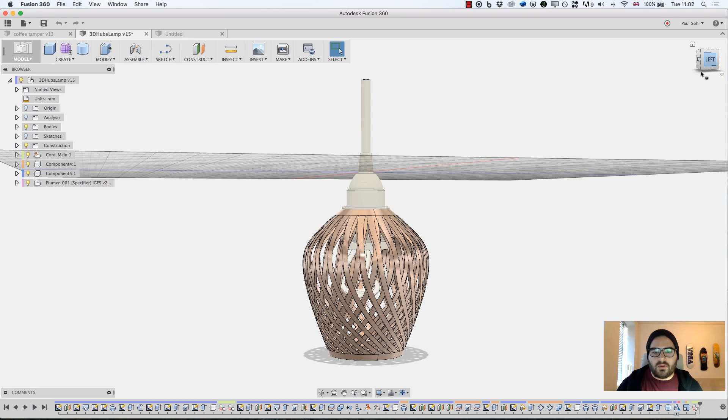This is the lampshade you guys will be building during this class. It looks pretty cool. It might look super scary and hard to build, but I promise you it's actually very easy.

So you'll be looking at a screen like this right now. Basically, this is Fusion 360. This is what you're going to be seeing. At the top here is your tools. Over here is a browser. This is where, as you model, everything that you build is going to show up. So if you ever do a 2D drawing, make a 3D piece, do a construction plane, whatever it is, it's always going to end up here in the browser.

Down here is comments. We'll talk about that in another video. You have your timeline down here, and the timeline is going to record everything that you do as you do it, meaning that if you make a mistake or need to make a change, you can rewind time on your model, and you can also just double click on one of these things and make a change to it. That might not make a huge amount of sense right now, but as we get into it, it'll make a lot of sense.

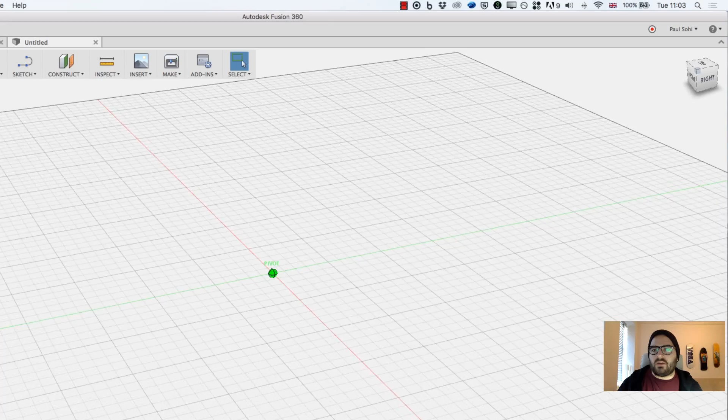In the top right over here, we've got the cube. This is your navigation cube. This basically helps you rotate and look around your model. You just grab it with the mouse and move it around, and you can click on the different faces. Your little home button, if you ever get lost, you can click on that.

Down here at the bottom, we've got a couple of settings and options. You can orbit the model manually this way if you like. Some people prefer that. You can use the look at button, which I'll show you how that works later on. The panning tool is just going to pan the model around, zooming in and out, and then a zoom window which will let you pick an area to zoom in on, or you can pick fit the model, which isn't going to do anything right now because I don't have anything in this one.

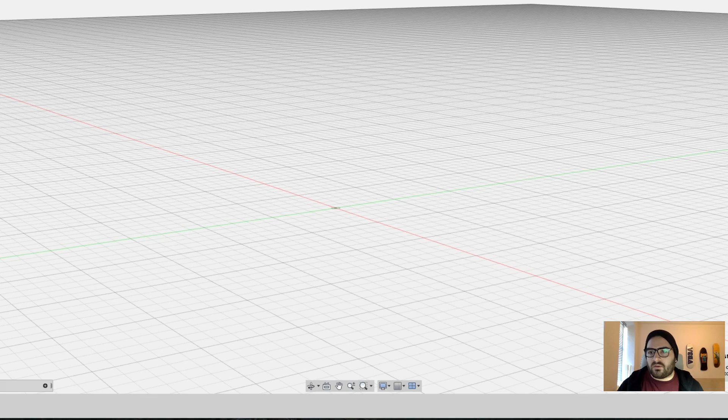And then over here you've got display settings, so you can see my display settings here. I'd recommend that you use the same ones that I do. You don't have to, but for the sake of this video, you might find it a bit easier to copy what I'm doing. Grids, we'll talk about these in another video as well.

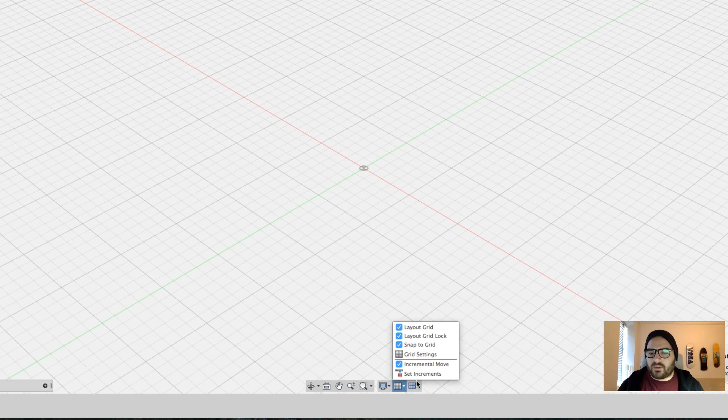And then viewports. Now I use the single viewport. I think it's great, it does everything really nicely. You can pick a multiple viewport mode as well, which is going to show you basically your same model on 4 different mini screens, so you can see it at an angle, then the front, the side, and the right, if that's what you want. But I'm going to go back to single view.

That's what I prefer. Now, one other thing is, it might not look like you've got a lot of tools up here, but actually if you see, you've got a little drop down menu and you can go through all these tools. We're going to be sticking to these two and the sketching one today. We use a little bit of construct as well.

Over here you can see you've got different workspaces. So right now we're in model. I'm just going to quickly explain what these 6 are. So model is basically solid modeling. So if you model a cube and you cut it in half, you'd basically have a solid object. Like if you sawed through that, you'd see that it was filled in.

Now, if you made the same cube in the patch environment, you would actually just have the surfaces. So it looked like a cube, but if you chopped it in, there'd be no thickness, which is not so great if you want to make it in the real world, but it has its uses.

Rendering is basically where you're going to make everything look pretty and set things up when you want to show off your work. Animation—you're not going to make a Pixar movie. Why would you want to? It's a lot of work.

But what you can do here is basically explosions, pan-arounds and rotations - you can show how your model works and give people a really good idea of what's happening in it. Simulation's a really good place to test stress, and you can also do thermal simulation now, which is a really cool thing that Fusion has added.

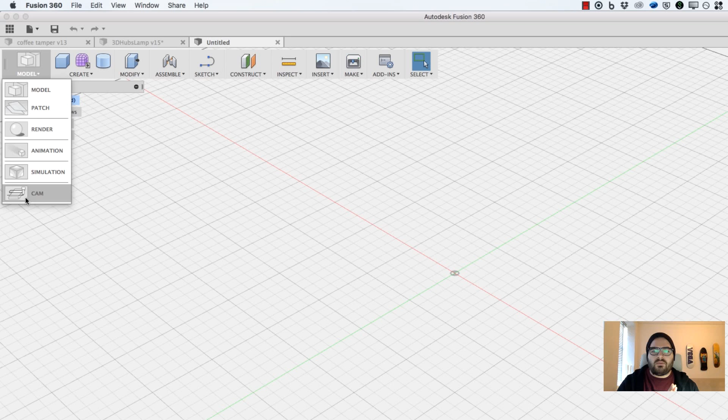And then finally CAM. CAM is basically CNC milling. For those of you who don't know about CNC milling, I'm going to put a video over here linking to the main Fusion 360 channel, and that'll show you how that works.

Okay, so let's jump right in. So to build this, what I'm going to do is start off with a 2D drawing. To do that, I'm going to go over to Sketch and Create Sketch.

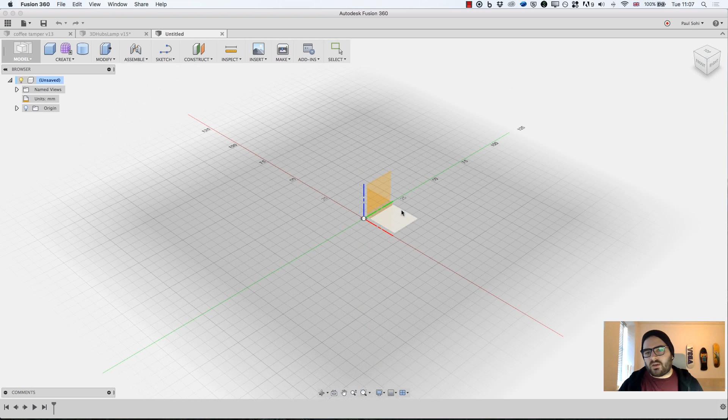I'm going to have these three planes show up, and they're asking me where I want to do my drawing. For the sake of this one, I'm going to pick this front plane. When I click on it, it jumps into this 2D view looking at that plane. I'm just going to pan my view over a little bit. You can see down here I've got this point, and this is the origin point of your drawing. Now your Fusion grid basically goes to infinity, but it has a 0 point, and that's this guy over here. This is important for this video.

So what I'm going to do next is go to Sketch, and go to Line. I'm going to draw two lines here. I'll start at the origin and draw one out like that - I'm not really going to pay attention to the dimension there. Then I'm going to click on this tick here, which basically says that I'm done drawing this line, but I want to stay in the line tool.

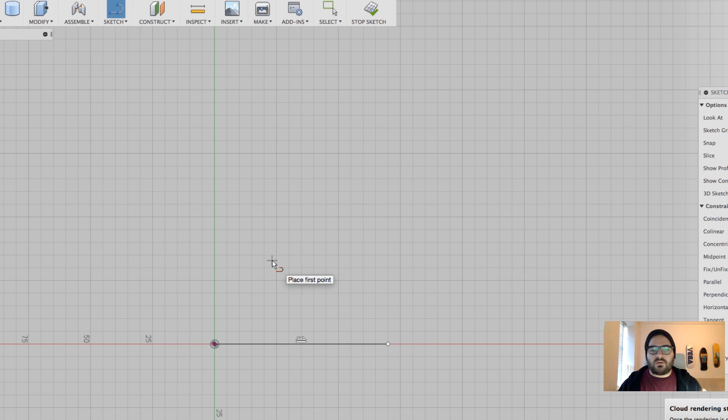You can see that next to my mouse I've still got the little line icon, meaning I can start drawing another line. Now I'm going to click there again and draw up and outwards like that. You can see I can keep drawing outward this time because I didn't hit that tick. So I'm going to do that and then hit OK. Now I'm going to hit Escape on my keyboard.

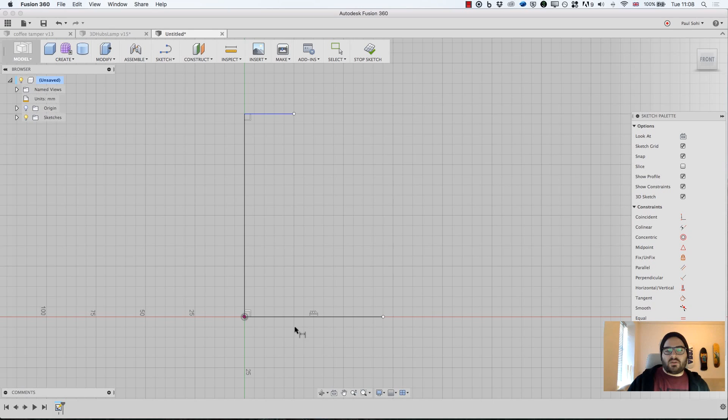And I'm going to go back to Sketch, and pick Sketch Dimension. Sketch Dimension basically means that when you click on these lines, it lets you add a dimension in.

For this lampshade, I'm working with an Ultimaker, so I know that the Ultimaker bed has basically got a safety margin of 180 millimeters by about 200 millimeters upwards. It can print bigger than that, but I try to stay a little bit inside those limits. The reason I'm telling you that right now is that it's kind of important for the way that I build this lampshade.

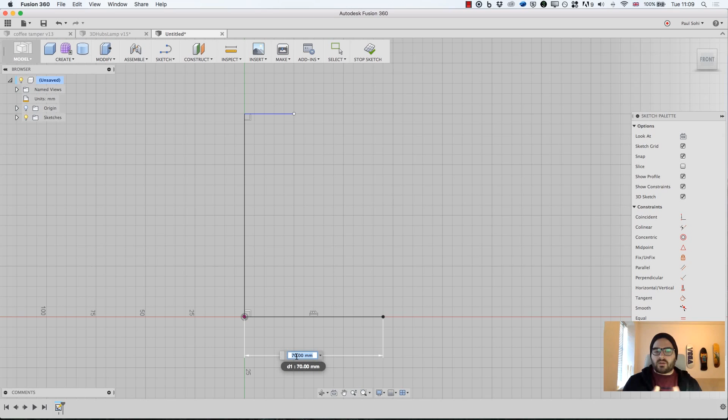There we go, that's the word I was looking for. So if I've got 180 millimeters across, and what I'm drawing right now is the profile of my lampshade, I know that whatever I do has to be half that - it can't be bigger than 180 millimeters divided by 2. So if you're not very good at maths, you could just type 180 over 2 and press enter, and you'll see that it's changed my dimension to 90 down there.

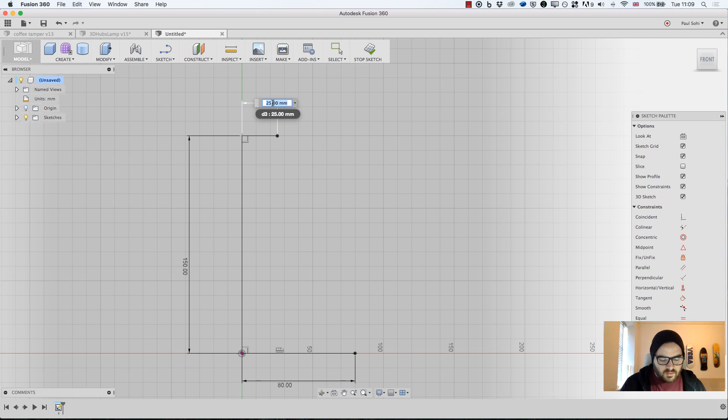Now I think 90 is actually a little bit too big, so I'm just going to double click on it and change that to 80. Then I'm going to click on this one here and make it a little bit taller - I think that's a bit short. I'm going to make this guy 150, and just zoom out a little bit so I can see everything. Pan over, and click this - whoops, click this guy here. I'm going to make that one a little bit bigger, let's go with 40. 40 sounds good, all right.

You might see that my lines have changed color now - they were blue to begin with, and now they've gone black. The reason they're black now is that Fusion's communicating to me through the color that these lines are fully constrained. It means they're locked in their angles, locked in their dimensions, and locked in their position as well.

If I try to grab these, nothing's going to happen. I can't move it around, I can't change the distance on them. They're locked in place, and that's really good for what I want to do here, because later on, if I want to make changes, I can just double click on these and make a change to it there.

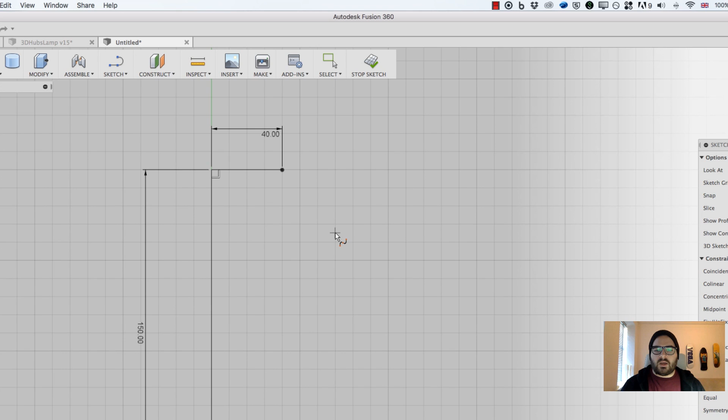So now I need to connect this through to create the profile of my lampshade. And what I'm going to do for that is use the spline tool. So I'm going to click on spline. The way the spline tool works is basically you click at a point that you want to start, and as you pull and click, you can see this shape is starting to appear. That's the profile of my lampshade.

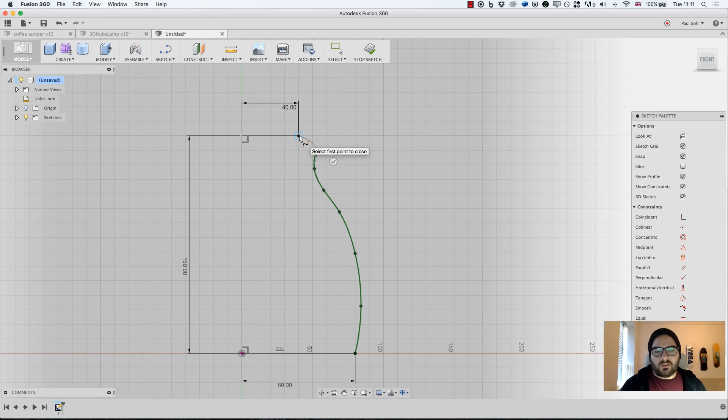Now when I click here, you can see this little blue square telling me I'm selecting the end point of that line. When I click on that one and hit this green tick to approve the profile, you'll see this color has filled in the sketch, and that lets you know your sketch is solid. So when you go into making something 3D from it, this color fill is telling you that, yeah, this is a good drawing, everything is connected together and it's closed, and it's definitely going to work when you want to make something from it. Now, I'm not really happy with that shape.

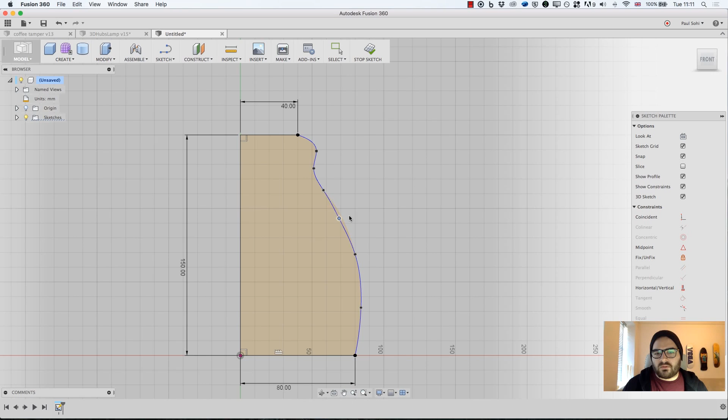I think that's a little weird. I've got a couple of options here. I could just delete the line and draw it again, but instead what I'm going to do is pick on some of these control points, and you can see I've got this crazy black and green stuff showing up. Basically the black points are the anchor points in my drawing, so you can see as I pull those on my spline, how that's affecting it. Then if I click on the line again, these green ones are the tangencies at those arcs. You can see this little green arc that's appeared, and if I pull that and stretch it out, you can see how that affects it as well.

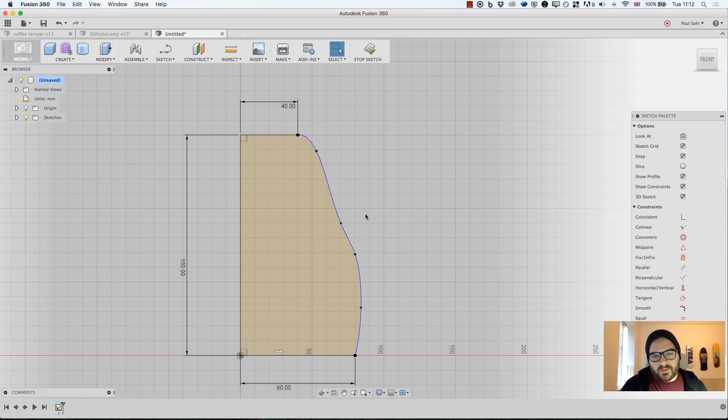That's gone a bit too crazy for me. I think I've got too many anchor points here, so I'm just going to pick that one and hit delete on my keyboard, and that's going to get rid of that one. And I don't need that one either. I'm going to pull this guy out a little bit like that and make it a bit bulbous over here, pull that one like this, and do that. Oh, it's a bit too much for me. Just going to change that shape up a little bit more. Okay, that looks pretty cool.

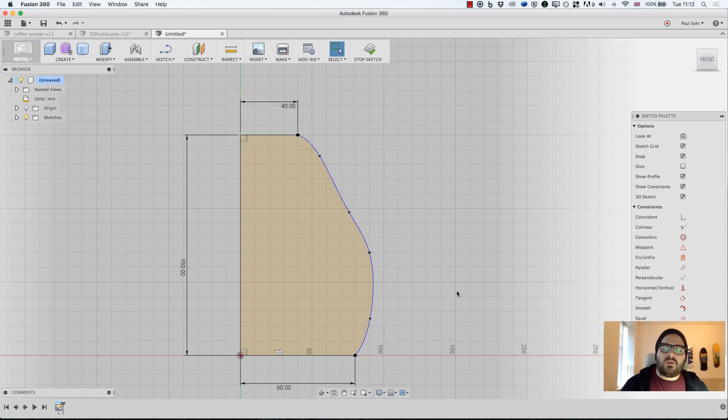So now what I'm going to do is stop my sketch by clicking on that guy, and I'm going to hit the home button up here so that I can see my drawing properly. I'm just going to pan it down a little bit.

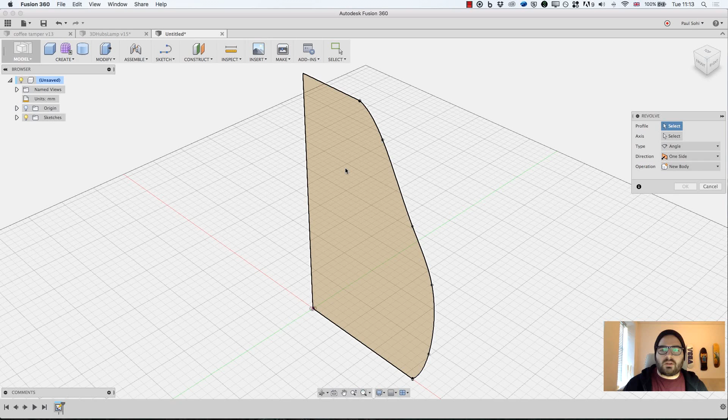Okay, so now to make this 3D, what I'm going to do is go over to Create, and I'm going to hit Revolve. So when I click on Revolve, I can click on this profile, and you'll see over here on my dialog box that my profile says 1 selected in it.

And next, oh, that's my doorbell.

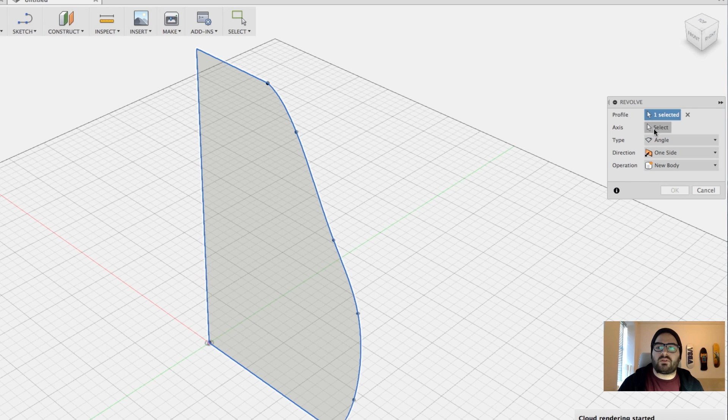And I'm back. All right, so that was a little weird. This is my dialog box, which is basically going to tell me everything I can do in this tool. So you can see it's telling me I'm in the Revolve tool, and it's asking me for a profile and for an axis. So next I'm going to click on axis. If I select that one, and I can pick the vertical edge of my drawing, and when I click on that, it's going to give me my shape. You can see it's just jumped right in.

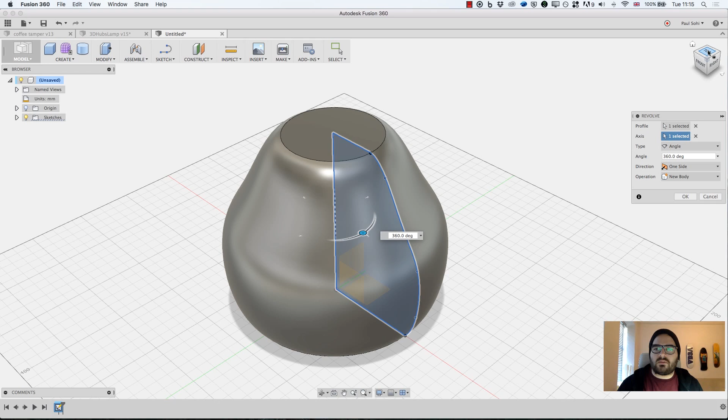Next, in the dialog box, you'll see that I am currently using type angle. If I open that up, you can see you've got a couple more options. We'll go through those other options in another video because they're not going to make any difference to this one for now. But just to show you what angle does, if I move to the top view, you can see I've got this wheel, and that wheel is controlling my degrees of the revolve. So obviously if I type 360, that's a full revolve and that brings it through. But just for now, what I'm going to do is a little bit of a Pac-Man, waka waka waka waka waka, because I can.

And then go back to 360, hit OK, and go to my home view. All right, so I've got my basic shape here.

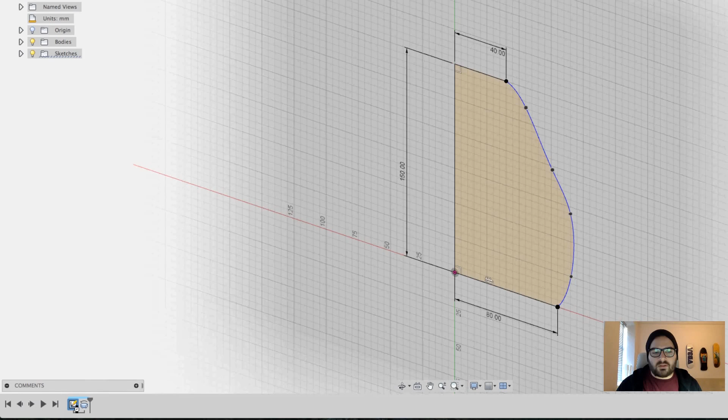Now, making yours, maybe you don't like the shape that you made. You don't have to hit undo or anything. If you go down here to your timeline, you can just double click on that sketch you did, and you can grab anchor points and move them around to change the shape.

So if I do that to mine, let me do something a little extreme, just so you can really see what it does. And if I stop the sketch, you can see instantly Fusion has recalculated that revolve you did and changed the shape of your lampshade.

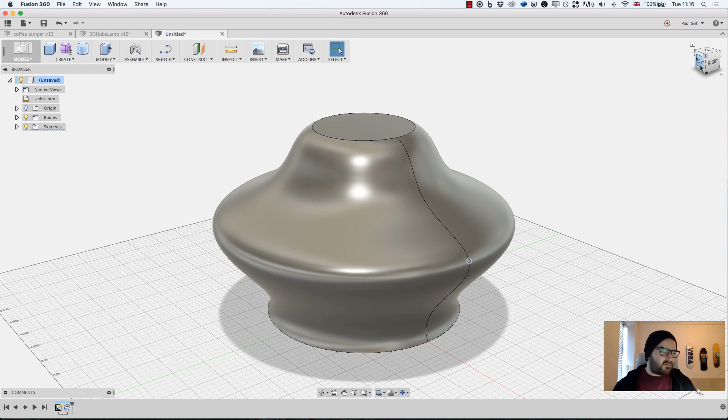Now, I'm not so keen on that flying saucer, so this is one of those few instances where I'm actually going to use undo, stop the sketch, and bring it back into that shape. All right, cool, so that's our general shape.

This is currently basically solid, not very useful as a lampshade. So what I'm going to do next is go under Inspect and use Section Analysis. You can see it's asking me for a face that I want to use.

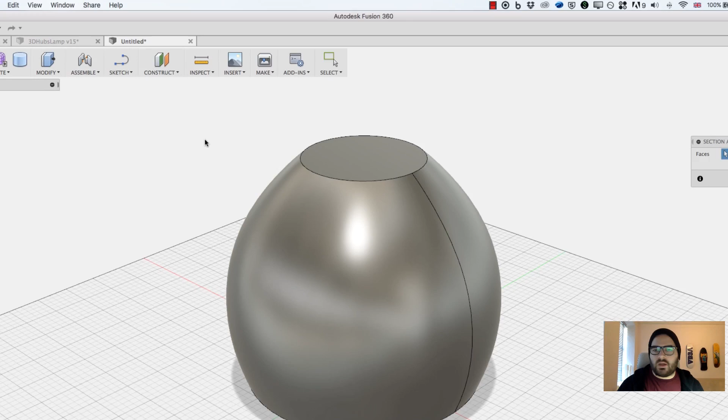Then I'm going to go over to my browser and turn my origin on, which are my 3 grid planes for my origin drawing, basically origin planes. You know, when I did that drawing earlier on, I picked one of these origin planes, and I'm going to pick that guy there, so you can see that's highlighted, and click on that.

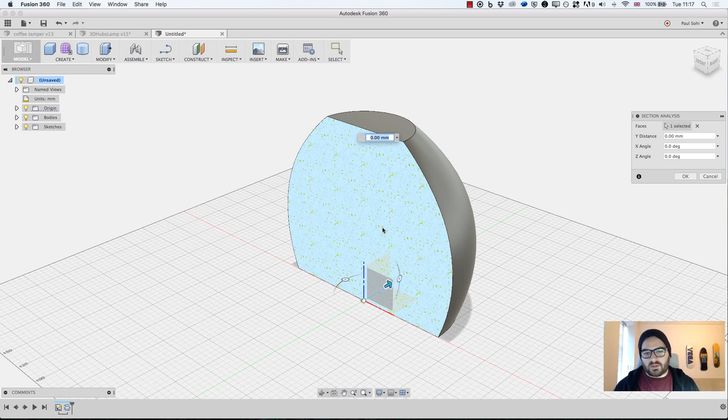And what the section analysis has done is basically chopped my drawing at that point, but not actually broken it into 2 pieces. It's just a visual thing to show me the inside of that drawing.

Now, I'm not going to play around with these. I could just move these around if I want to, which will show me a section at a different point, and these wheels will change the angle as well. But I don't want to make any changes to those. So you can see here I've got 0, 0, 0, which is what I want. Great.

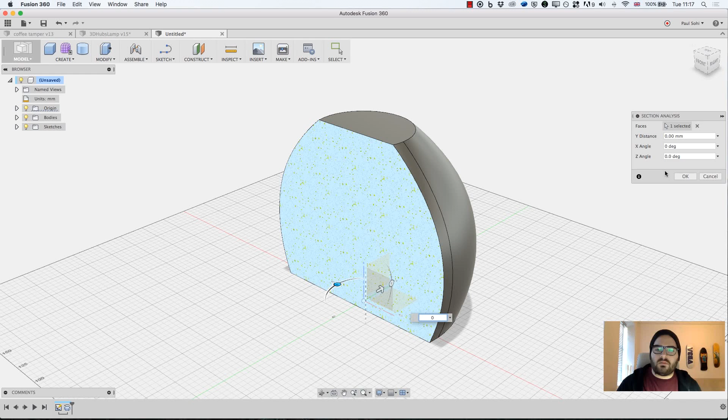And put that back there, actually, and hit OK. All right, now the reason I've done that is that the next tool I'm going to use over here under Modify is called Shell.

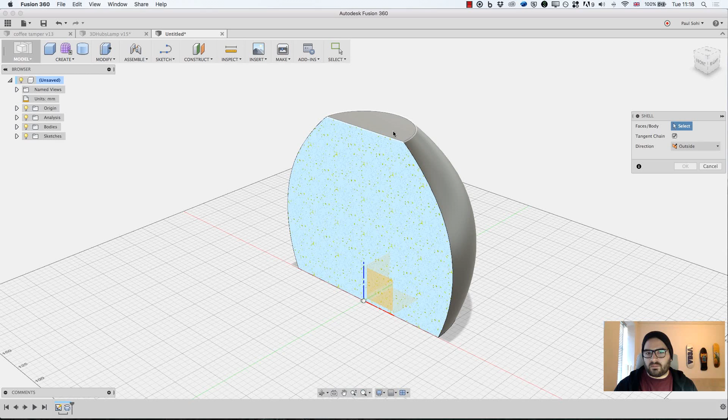And what Shell's going to do is basically take a solid object and turn it into a skin. So it's asking me for a face or a body. Now this is kind of important because I want to shell the whole thing, not just from a single face, rather than selecting a face — because if I try to select a face here and then type a distance, it's going to create a vase, and that's not what I want.

So I'm going to just undo that. I want to shell the whole thing so that it's a solid object for the time being.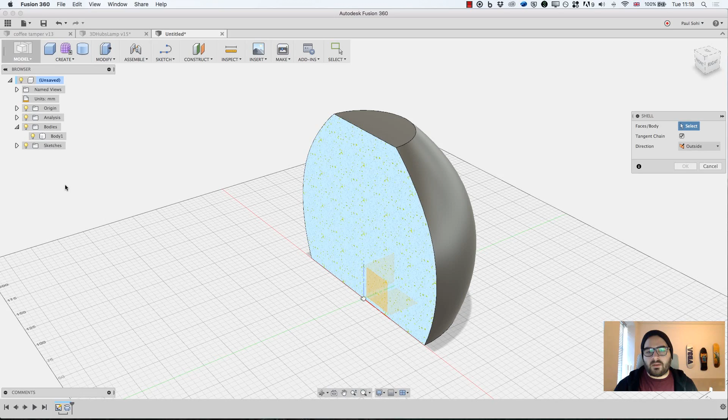And to do that, what I'm going to do is open up here, bodies, and you'll notice, by the way, that at the beginning of this you didn't really have a lot happening in here, but now you have bodies with body 1. You've got sketches with your sketch drawing in it, which the light bulb is turned off, so Fusion automatically switched that off after you've used it. It's not gone, I could just turn it back on there.

And I have one for analysis. So everything is being organized automatically for you as you go along, which is super handy.

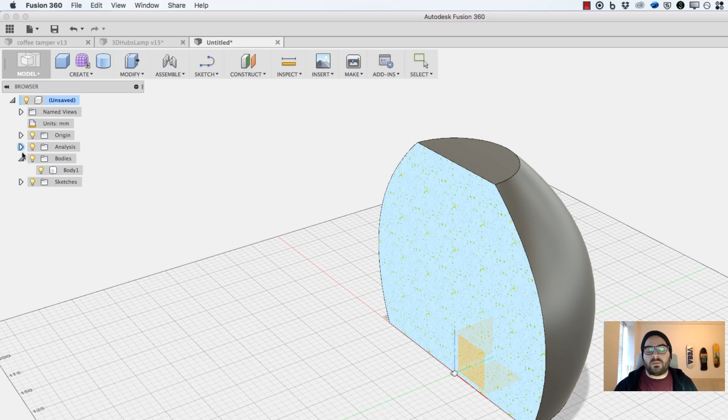So what I'm going to do is just click on body 1. And you can see already it remembered the 2 millimeters that I typed earlier on, and it's done an outside shell. Now actually what I want is an inside shell, so I'm just going to change that to inside and type 2 here.

You know what, I'm actually going to make mine 2.4 because I know that I'm 3D printing this later on. So I'm going to type 2.4, just make it a little bit thicker, but basically as thin as the 3D printer can do. And I'm just going to hit OK.

Cool, all right. So if I jump back over to this lampshade, you'll see there's this really cool pattern work happening on it, but you'll also notice there's a stop at the bottom and a stop at the top. The reason those stoppers are there is basically for the strength of the lampshade. Now we're not really talking a huge amount about product design right now, we're really just going through how Fusion 360 works.

Just to step aside for a second and talk about product design: if you did that pattern from top to bottom, because you know that you're manufacturing it by 3D printing, that would make it really weak, because the pattern would go all the way to the top and there's no strength basically to stop the compression. Even though as a lampshade not a lot is really happening to it force-wise, you don't want to be in a position where it might crack or break.

So the easiest way to basically fix that is to create a band at the bottom and a band at the top, which is going to give it strength because those areas are solid. So that was a really long-winded way of saying that we're going to chop this body in 3 places now.

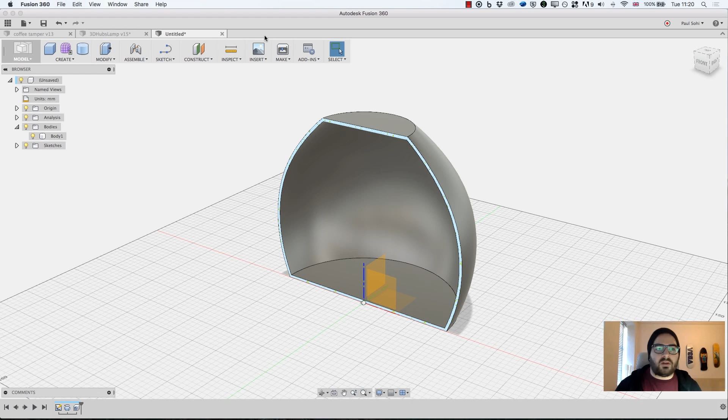To do that, I'm going to turn my origin off before I start this. And I'm going to go to Construct and Offset Plane, and pick that top face of my model. You can see I've got this orange grid, which is basically telling me what my construction plane is. And I'm going to type -10.

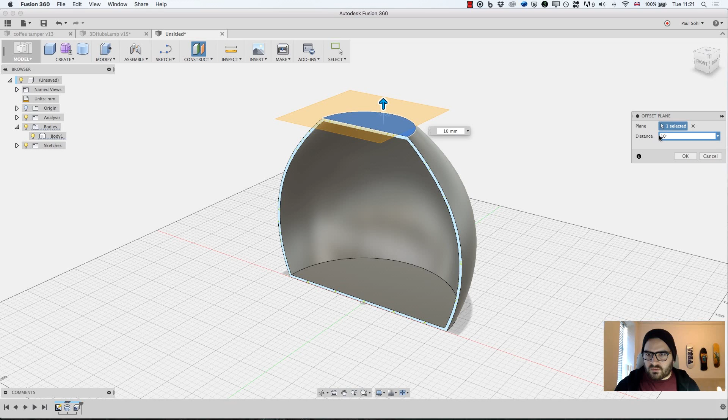The reason I type minus is that if I go back to 0, you'll see that my arrow is pointing upwards right now. So if I type 10, that's not really helpful to me because it's going the wrong way. I can always just put a minus in front of it, and it's going to go the other way. Great, that's exactly what I want.

Hit OK. Now I'm going to just rotate with my navigation cube to see the bottom of my drawing and do the same thing. Go Construct, Offset Plane, pick that one, and it's pointing the wrong way again for me, so I'm just going to type -10 and hit OK.

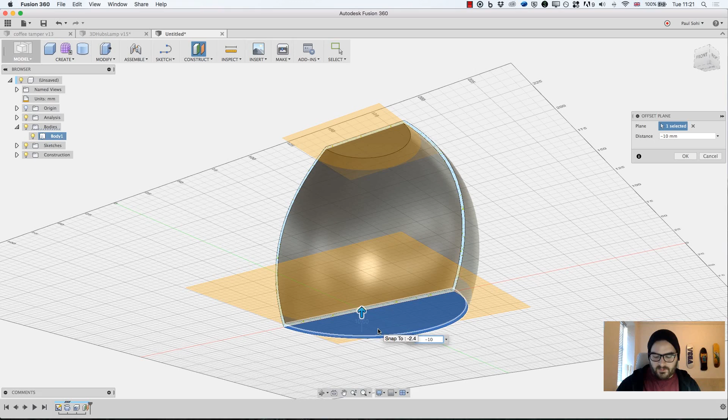These grids, by the way, are resizable, so if they're too big or too small, you can just grab an edge and move it like that, or grab a corner and move it like that. It doesn't actually need to cover the whole of your model, and you'll see why in the next step.

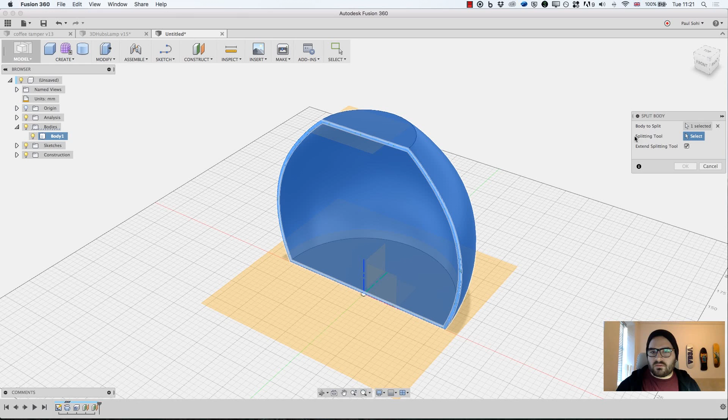So next I'm going to go to Modify, and down to Split Body, and I'm going to pick my body to split. You can see over here is asking for body to split. And then I'm going to ask for the splitting tool, so I'm going to pick that one. And you'll see this red disc.

That red disc is basically showing you where that cut is going to happen. So if I rotate around, you can see what's happening, and that cut is going to happen where my construction plane was. That construction plane, because it's a construction plane, actually goes to infinity. The grid that you see, the orange square, that's basically just there for reference, so you can visualize where that is in space.

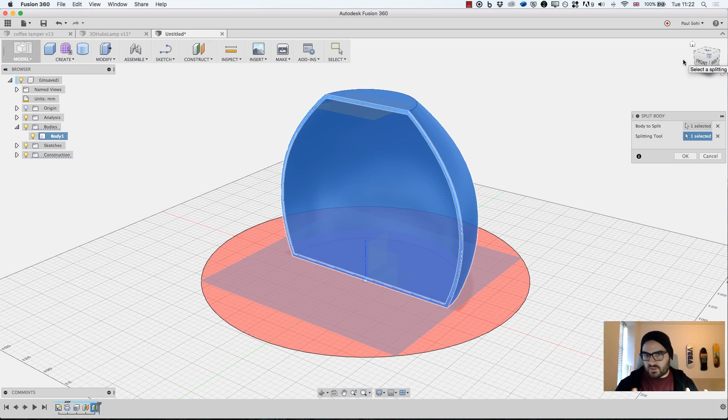So with that done, I'll just hit OK. And you can see I've got that edge line now there, showing me that I've got a split. You can also see I've got an extra body in my body folder. So I'm going to do the other split for the top one there.

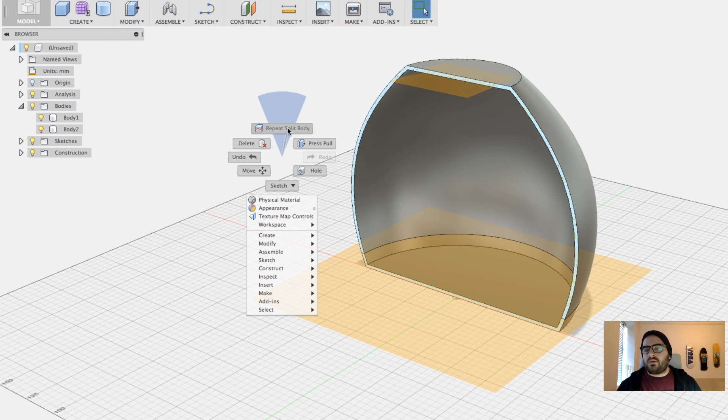This time, rather than just going to Modify and Split Body, just to show you another way you can do that: if you right click, you'll see the last tool that you used is up here on this wheel. I'm going to talk more about this wheel in another video, but for now I'm just going to click on that. So next, just click my body, go to splitting tool, pick that, hit OK, and you'll see now I've got 3 bodies.

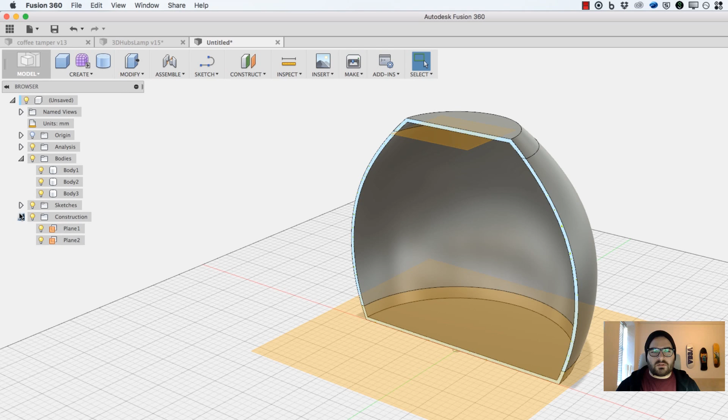Now for the next step, I don't want to affect this bit and I don't want to affect that bit down there. So I'm going to open up construction, turn plane 2 and plane 1 off, and then turn off body 3 and body 2. Those are just the numbers that my top and bottom have been given — yours might have different numbers, just make sure that you're turning the top and the bottom piece off. I'm going to turn my analysis off as well because I don't need that on for now.

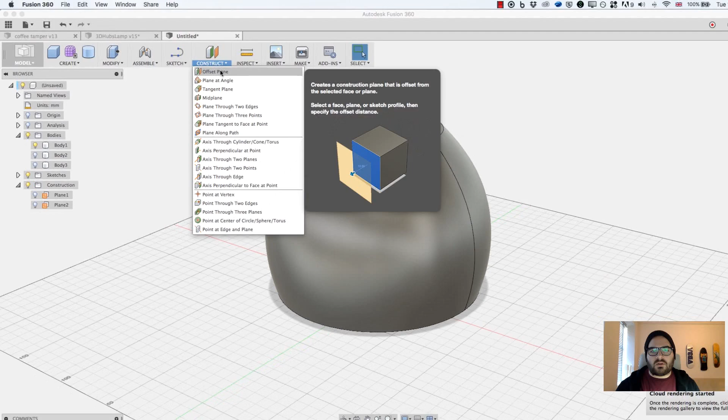I'm going to go to Construct and Offset Plane, turn my origin on again, and pick that front plane one more time. This time I'm going to just grab the blue arrow and move it until this construction plane is somewhere outside of my lampshade. That looks like a good position, so I'm going to hit OK there. And now I'm going to create a new sketch on that construction plane that I just created.

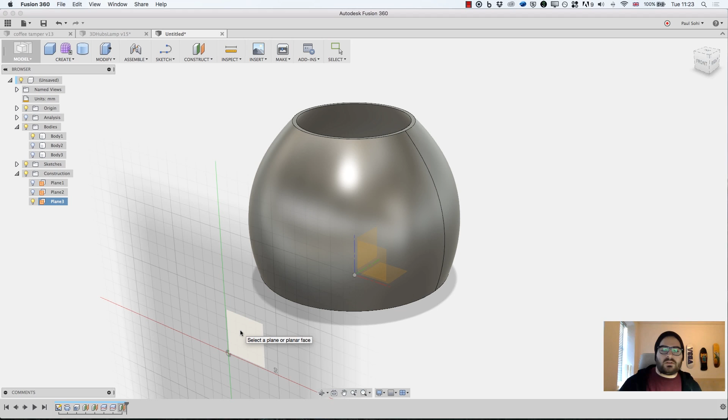I'm going to click on that, and it's going to jump to my 2D view. If I was unsure whether I was on that construction plane or not, I can rotate around and you'll see that my grid is where that construction plane was. So that's telling me my 2D drawing is happening somewhere away from my lampshade. My lampshade is here, and my drawing is happening over here, which is exactly what I want.

I want to use some of this 3D model as a reference, so I'm going to turn my origin off again. I'll go to Sketch, down to Project/Include, and pick Project - that's P on the keyboard if you want the shortcut. I'm going to click on my lampshade there and hit OK. You'll see I've got these purple dots and purple lines, which are basically the silhouette of my lampshade brought into the 2D space.

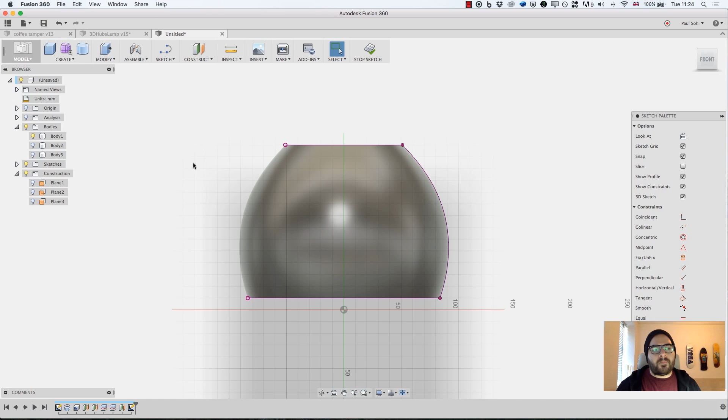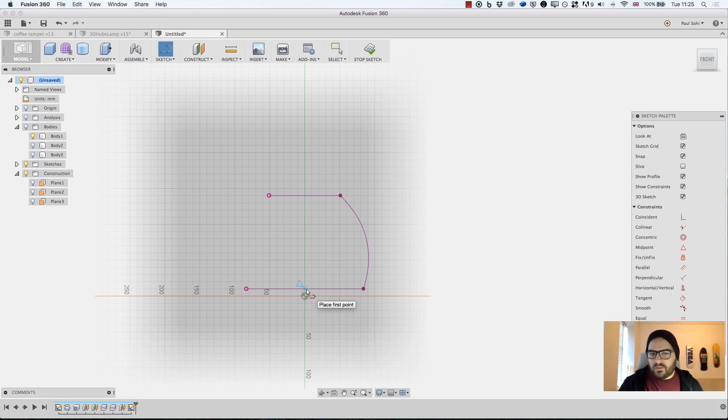I'm going to turn off the master folder for the bodies because I don't need to worry about that right now. So a couple of things first - I'll go to Sketch and Line, and hover over the middle point down here. You'll see this X, which tells me I'm intersecting that line, and a triangle telling me I'm at the midpoint. Then I'll move my mouse carefully down, and you'll see it's snapping relative to that. Then I'll draw up, hit Escape, and click on that line.

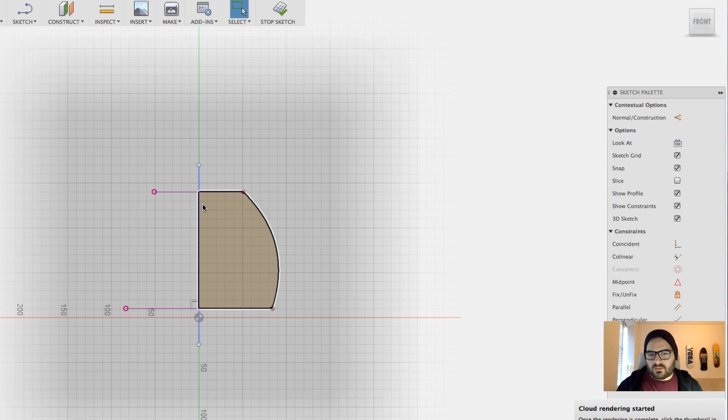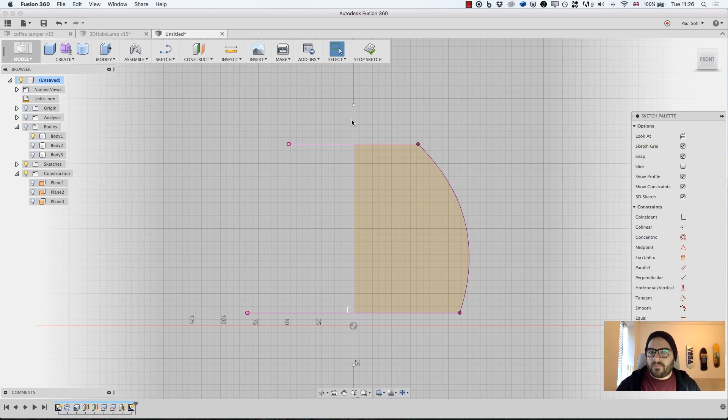In the Sketch Palette, there's a contextual option that appears when I select a line, called Normal/Construction. I'll turn that on, and you'll see it's changed my line to an orange dashed line. In the same way that a construction plane helps me do things in 3D space, a construction line like this is going to help me reference things for my 2D work, but not actually affect my drawing. If I change it back to normal, you can see that area fills up because I've created a boundary with the lines. But if I turn it back into a construction line, that's gone, because this line is only for reference, and that's exactly what I want.

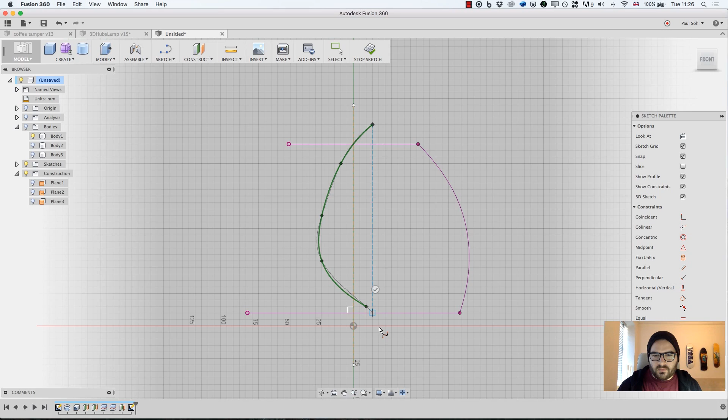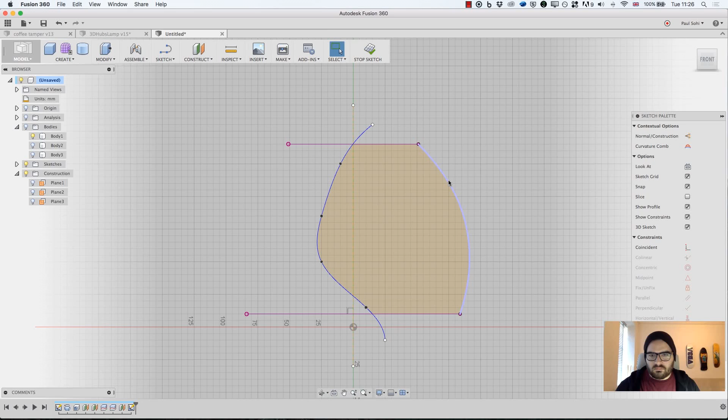Next, I'm going to go to Sketch and pick Spline. Basically what I'm going to do now is create the pattern for my lampshade. I'll start somewhere over here and draw this arcing shape down like that. Notice my spline has gone over the top and over the bottom there, and that's going to be really helpful later on, so definitely bear that in mind. I'm just going to get rid of this arc here so I don't get that solid fill, because I don't need that. There we go, and I'm going to tweak my spline a little bit.

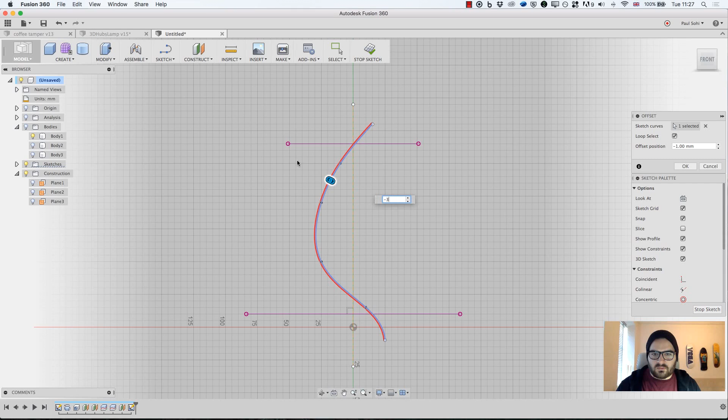Next I'm going to offset this, so I'll go to Sketch and go to Offset, click that, and pick my line. I'm going to give it an offset of -3. That looks good to me.

Next, I want to go to Sketch and Line, and just fill these ends in. I'm going to click here and click here, then zoom out and zoom in on this guy and fill that in.

Now I don't need my projection lines anymore, so I'm going to delete those. I'll pick that, then hold down Shift on my keyboard, click on that one, and hit delete. Now I need to mirror this to create my pattern.

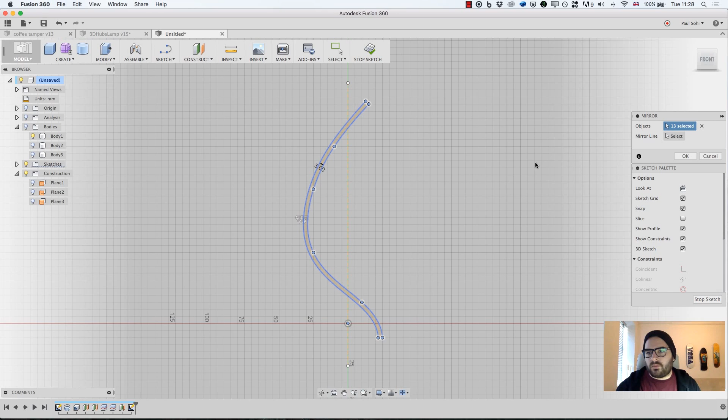I'll go to Sketch and then Mirror, and pick this by drawing a window around it. I'm going to start on the left side of my drawing and go to the right to do that, and that's picked all the parts of my drawing I want to mirror. Next is my mirror line - if I click on this and then click here, it shows a preview of what that mirror line will look like. Then hit OK. Cool.

I have these little intersections happening, and I need to get rid of those before I can jump back to the 3D. So I'm going to go to Sketch, go to Trim, and trim that guy, that guy, that guy, and that guy. Then go up here and do the same thing. You'll notice the line highlighted in red is basically the part that's going to be chopped off.

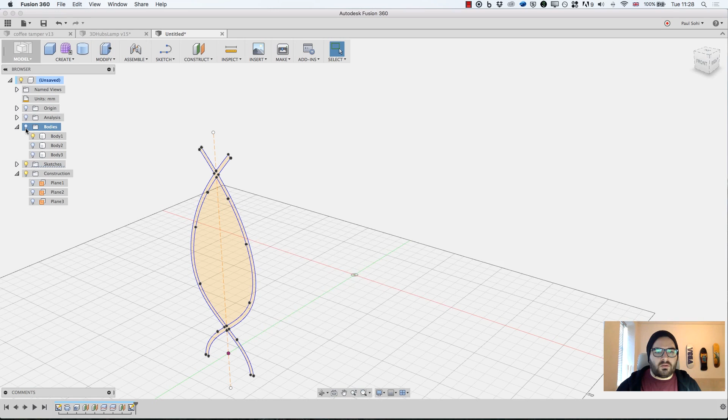Cool, that's done. I can hit Stop Sketch now and turn my bodies back on. What I'm going to do is basically extrude this profile into my lampshade.

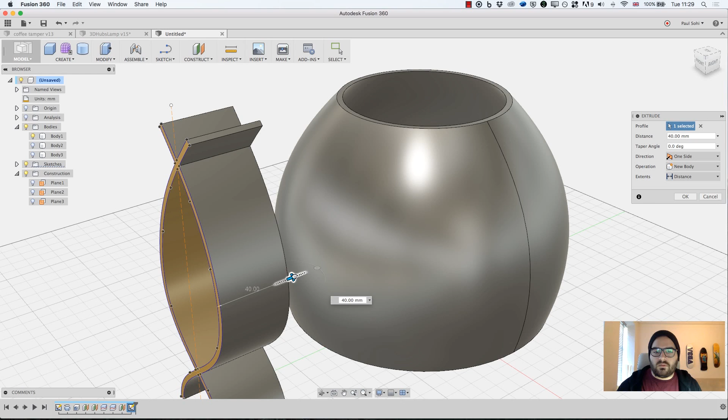To do that, I'm going to go to Create and Extrude. I'm just going to zoom in a little bit here and pick that profile of my drawing. As I start to push it out, you'll notice it's creating a new body, so it's a solid object. Once it starts to touch my model, when a collision is detected in Fusion, it changes to red and automatically changes the operation to cut. I'm just going to keep pushing it and ignore that for now.

Okay, I'm the whole way through. Now I don't want to cut, and bear in mind I haven't gone all the way through my lampshade, I've gone through one face. What I want is called an intersection.

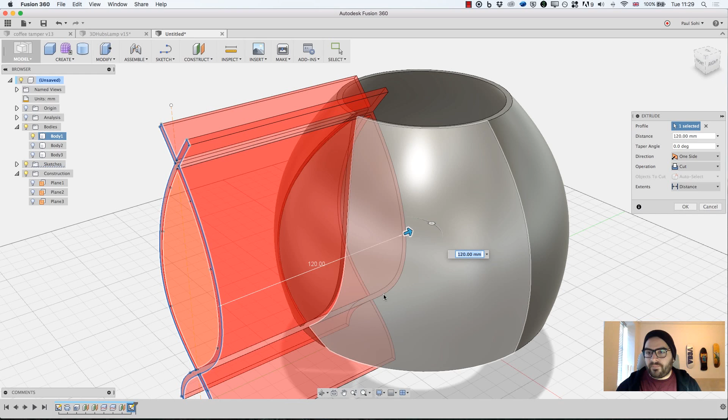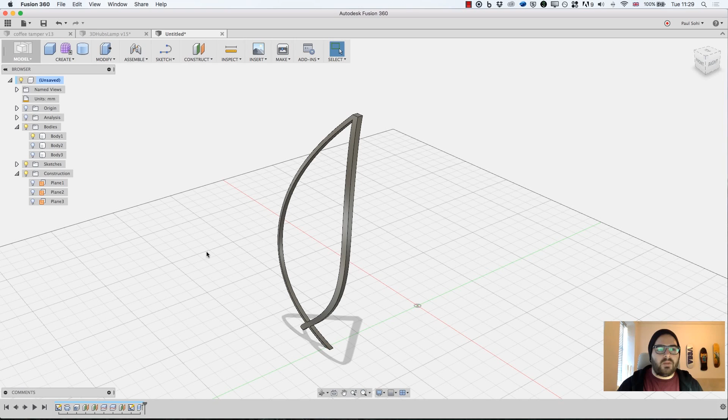So if I go to Operation and pick Intersect, you'll see I'm left over with the volume of where those two objects touch. The profile that's cut through it and the profile of my lampshade create this shape, and that's what I want. I'm going to hit OK now. So that's what I wanted to see, and I'm going to turn the top and bottom of my lampshade back on.

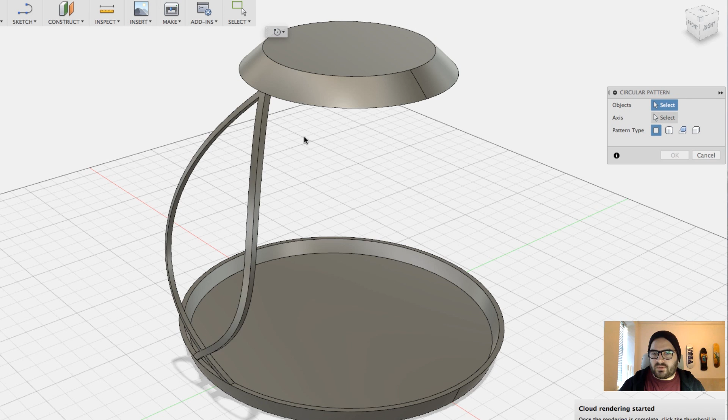Next, I'm going to pattern this bit round to create the full shape. So I'll go to Create, Pattern, Circular Pattern, and before I pick anything, you'll see this pattern type with a few options. Currently it's set to pick pattern faces, which means if I click on that it will only pattern that face, which isn't helpful. I want to pattern the whole thing, so I'm going to change that to pattern bodies and then click on it.

Next, I'm going to pick an axis, and you'll see my origins popped up. Now I drew my lampshade on the origin, meaning I could just click that guy there, and you'll see it jumped 3 in. But you can also just pick one of these circular faces on your lampshade, and that'll do it as well.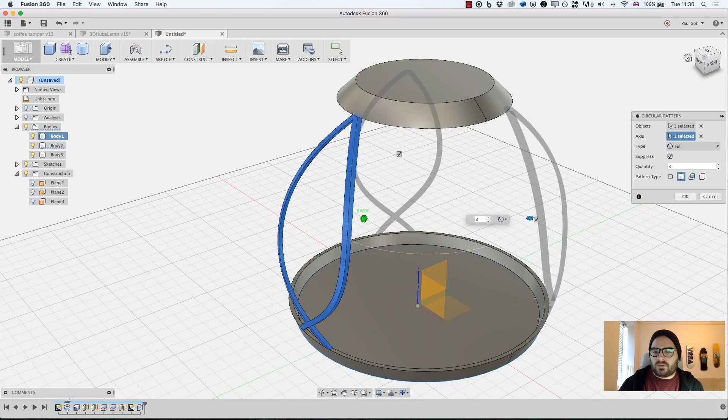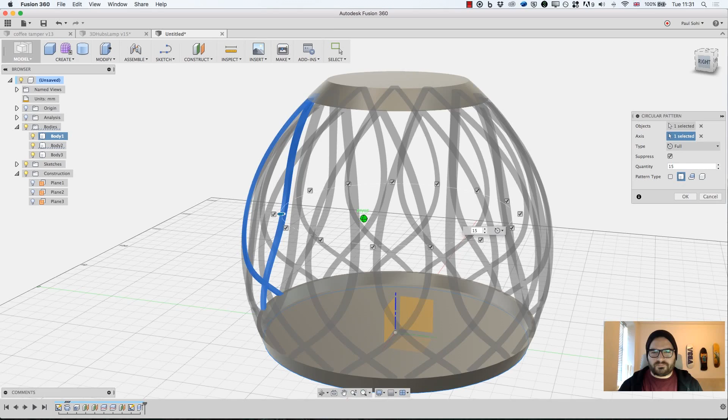Next, you'll see it's defaulted to 3. 3 is not enough. I can grab this wheel and move it in the plus direction, which adds more repetitions to my drawing. 8 still doesn't feel like enough, but my wheel's stopped turning, so I'm going to type 15 in here. Still don't think that's quite enough yet, I'm going to change that to 20. That looks good, and I'm just going to hit OK.

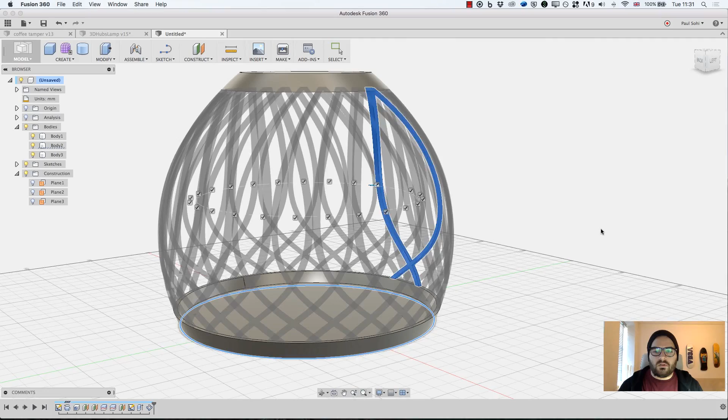You can see it's just created 20 repetitions, and that's made my pattern. Now if I'm not happy with it, I can always double click on that circular pattern and add more or less. So I could always just bump this up to 25 and hit OK, and basically just keep adding and removing as much as you want.

You'll see over here in bodies I've got a huge number of bodies, and that's because all of this stuff has come through as independent. If I click on that, you can see it's highlighted that one. If I click on number 20, it's highlighted that one, and it's because these are all basically not connected yet. They're all independent pieces, so I want to combine this into one object because ultimately it is just one lampshade.

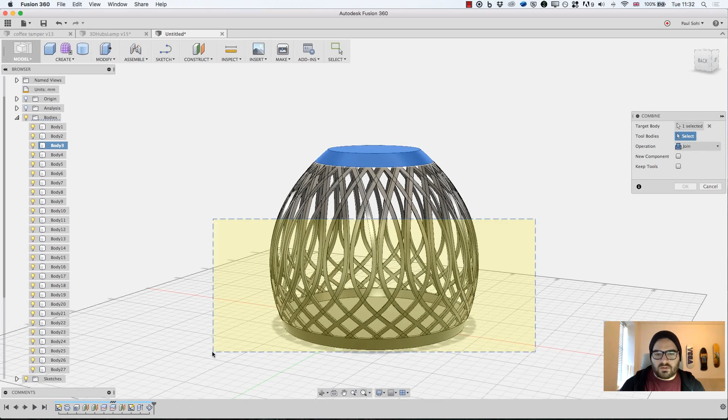To do that, I'm going to go to Modify, then down to Combine. Right here where it says Operation, I'm going to make sure that's on Join, and I don't want to keep the tool, so I'll turn that off. My target body is this one over here. This time I'm going to drag from right to left and basically touch everything I want to connect, like that. I can rotate around and make sure everything is connected. Cool, that's what I want, I'm going to hit OK.

Now this might take a little while, it's quite a lot of calculation to figure out where all those intersections are happening. So I might cut this video here and then jump back in. See you in a second.

Cool, we're back. So you can see I've just got one body, in this case it's called body 3. That's because body 3 was that top shape there, and that's what I've connected everything to. We're nearly done — basically we need to make a hole in the bottom and a hole in the top, and then we're good to go.

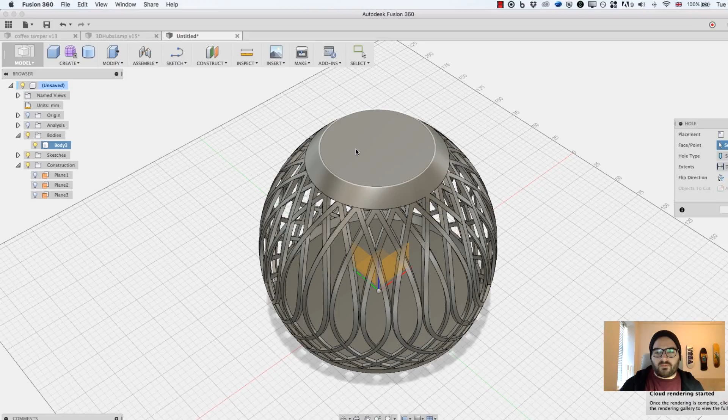So to do that, I'm going to use the hole tool. If I go to Create, then Hole, and pick that top face up there, you'll see that it's simulating a drill hole, like the point on the end of a drill. We're 3D printing this so we wouldn't actually have a drill hole, but it's going straight through that surface anyway, so it's not going to make a difference.

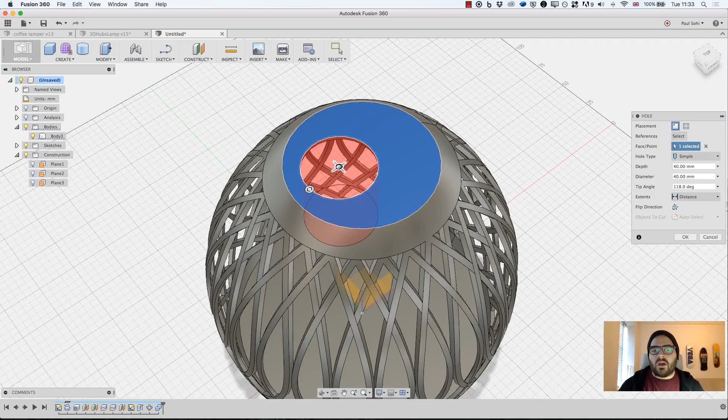I'm going to grab this little guy up here, and as I move it around you can see faintly that Fusion has detected the center of that top face. As I get closer to it, it'll snap to it. And there we go, now it's snapped in place.

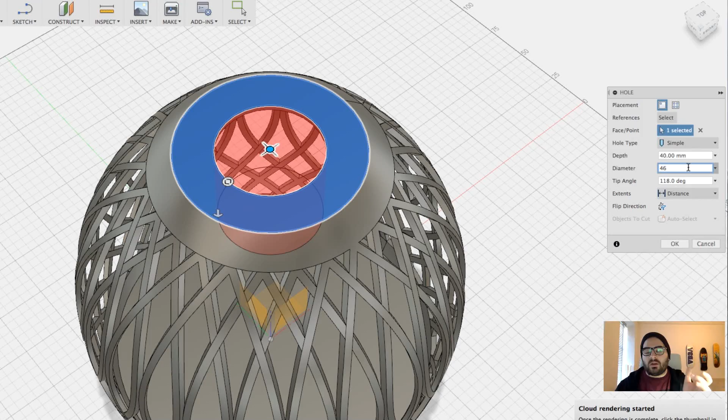Over here, I'm going to set the diameter to 46. The reason I'm using 46 is that the pendant I have to hang the lampshade from is a 46 millimeter diameter piece, so I just want to make sure it fits on there okay. I'm going to hit OK on that.

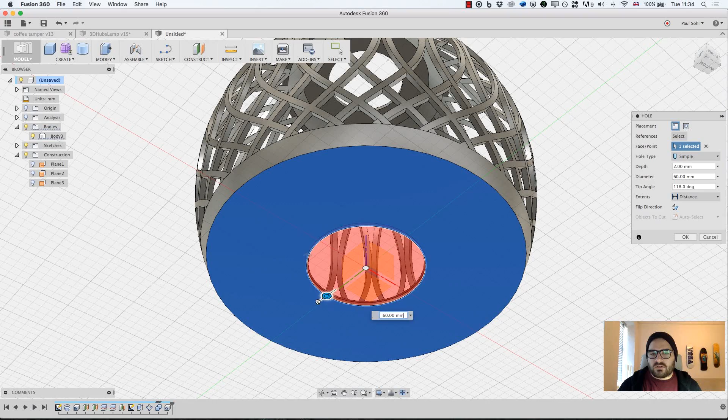Then I'm going to turn around to the bottom and do the same thing. I'll right click, repeat hole, pick that bottom face, and make sure I've snapped to the origin, which is going to be the origin of my drawing in this case. This time I'm going to grab this guy to change the size of my diameter, and I want to make it nice and big, so I'm going to move it to 150 — looks good. Make sure I'm not cutting anything.

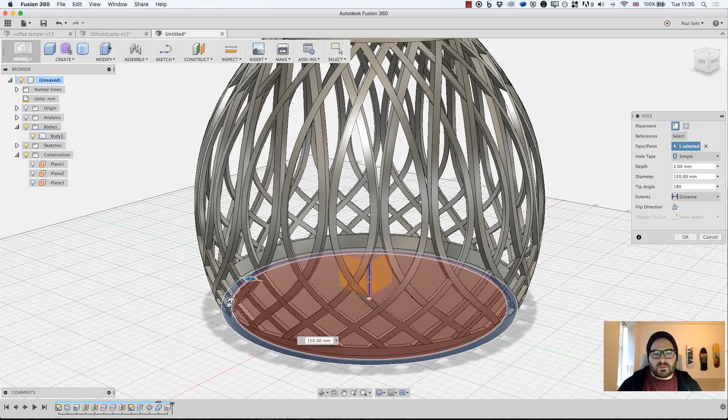I'm afraid that this point shape might affect my drawing — you can see here where it says tip angle. If I just change that to 180, it'll make it flat. Great, that's what I want. I'll just push it up to make sure I've gone the whole way through. There we go, and hit OK.

And that's basically it. You've now made yourself a lampshade. Congratulations.

If you want to make any changes to anything, or you're unhappy with the shape, you don't have to worry about it. Down here in your timeline, you can double click on any one of these and make a change to it — change its dimensions, change the drawing, change your construction planes, everything. You can make changes to all of it, and that's going to update your drawing and your model afterwards.

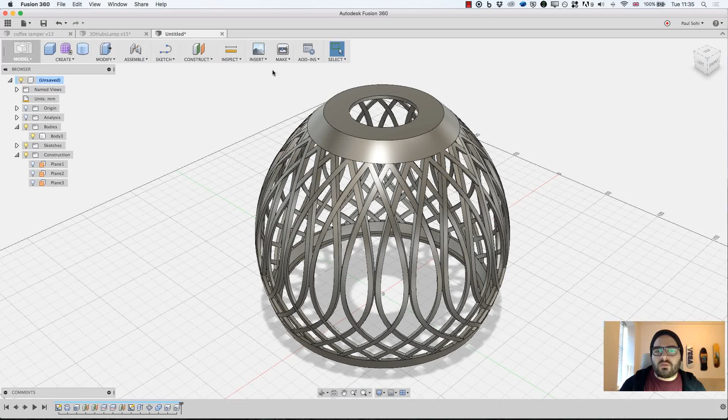So I guess we might as well show you 3D printing because it's so easy. To do that, we'll go to Make, 3D Print, pick the body. I'm going to make sure my refinement is set to high.

I've turned this option off down here, which is Send to 3D Print Utility. But if you own an Ultimaker or a MakerBot, or basically any other 3D printer, you can turn this on — Fusion has already detected these options, so if I wanted to send it to MeshMixer, MakerBot, or Print Studio, I can just do that. For now, I'm going to leave that off.

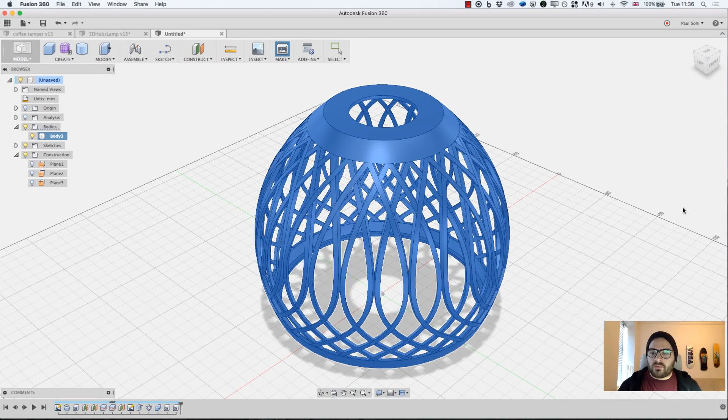When I hit OK, I'll get an option asking where I want to save my file, so I'm going to call this Lampshade. I'll save it on my desktop, hit save, and that's it. Now on my desktop you'll see I've got an STL, and that STL I can 3D print.